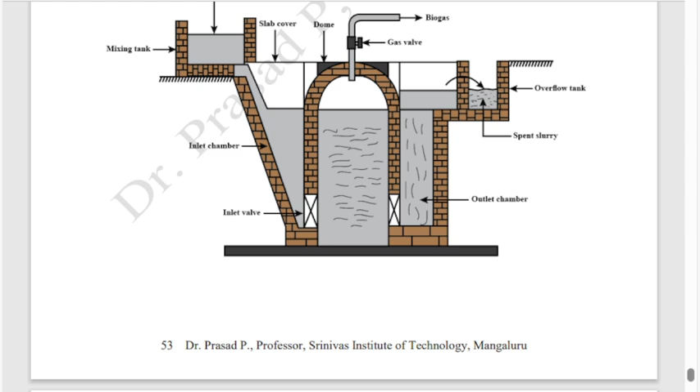Now let us see the different types of biogas plants which are currently available or in use. Biogas digesters are designed to increase or facilitate the anaerobic digestion process. Common types include fixed dome digesters, floating drum digesters, plug flow digesters, and batch digesters. We'll see all four in this class video, only as an introduction. We're not going in depth into how they are built, the materials used, or the exact terms. We are just introducing what different types are there.

So we can see the fixed dome digester. Here everything is fixed, made with bricks. Everything you can see is fixed, including the dome. Do you know what a dome is? The dome of this particular structure is called the dome. So the dome structure is fixed, therefore it's called the fixed case.

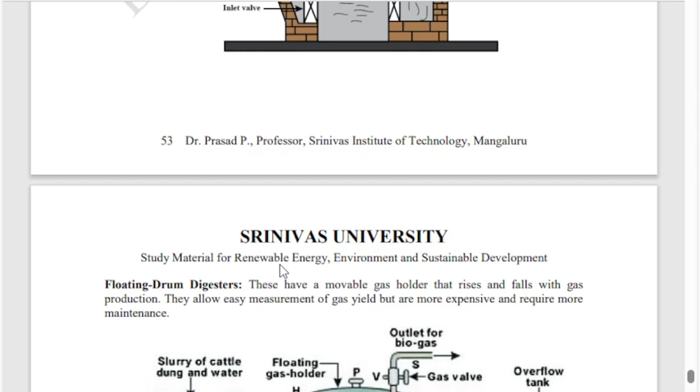Then here comes the floating drum digester. You can see this is the drum, and it can float. It can come down or go up depending on the water or content present. If it decreases, it comes down; if gas pressure pushes it, it goes up. So we have the floating drum case.

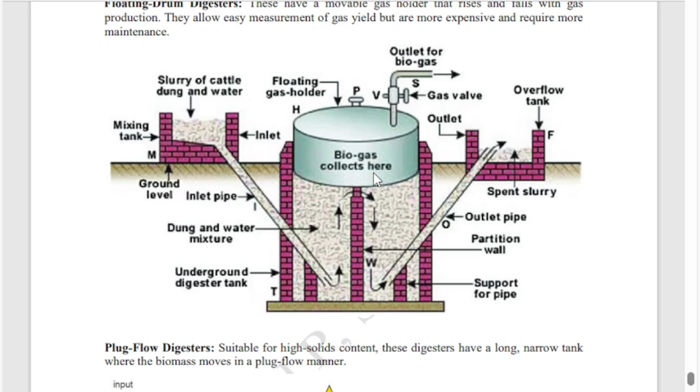And there is plug flow, just like step by step movement of the food waste, finally getting converted into gaseous form. There is a screw for rotation. Whatever input is given through the screw rotates and reaches the end, and different biochemical reactions take place in between, and the gas is collected.

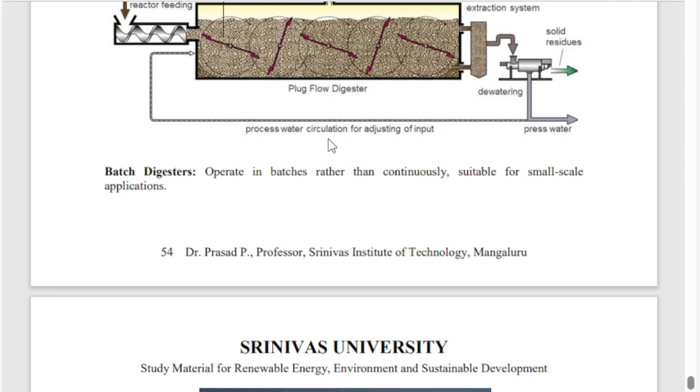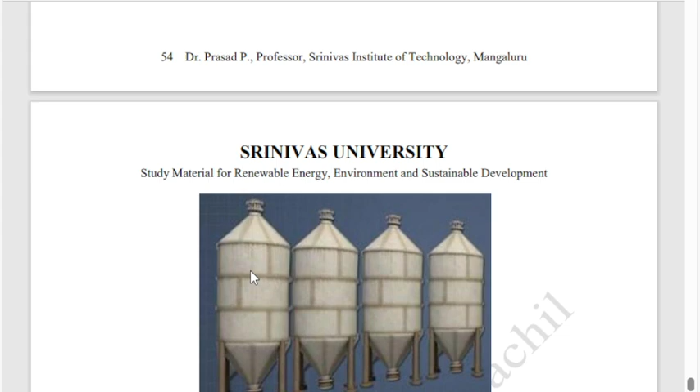That is plug flow. And finally, there is the batch digester. Batch digesters work step by step. Sometimes it is kept in a first container for some time, then transferred to a second one, then after some time a third one, then after that into the last one. And whatever gas is formed is used. That is the batch type. So these are the four different types of biogas digesters.

Roughly, you need to draw the diagram if it's asked. At least you should remember the names: fixed dome digester consists of a fixed, non-movable dome and a digester tank. They are simple, durable, and relatively low cost.

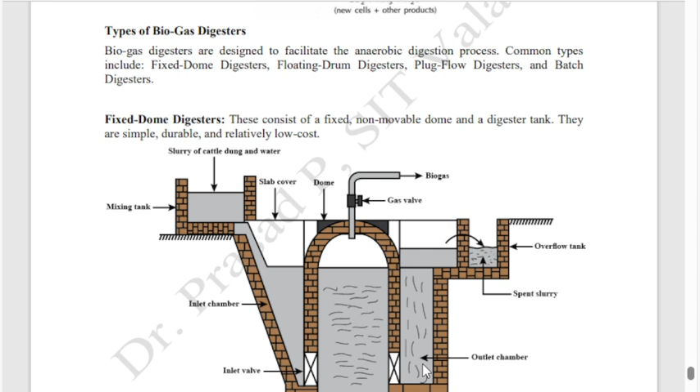There is a tank to supply the waste food, a mixing tank. Then it is taken inside, where the biochemical reaction takes place. Gas will be formed and taken out using a gas valve, and whatever waste is left after digestion will, by default, be pushed to another chamber, from where it has to be taken out.

Second is the floating drum digester. They have a movable gas holder that rises and falls with gas production, allowing easy measurement of gas yield, but they are more expensive and require more maintenance. Once the drum meter moves up, that indicates gas generation inside; if the drum goes down, it means gas production is less. So we get an indication of the yield by seeing the drum's movement. But making such moving drums is a little more expensive and requires more maintenance.

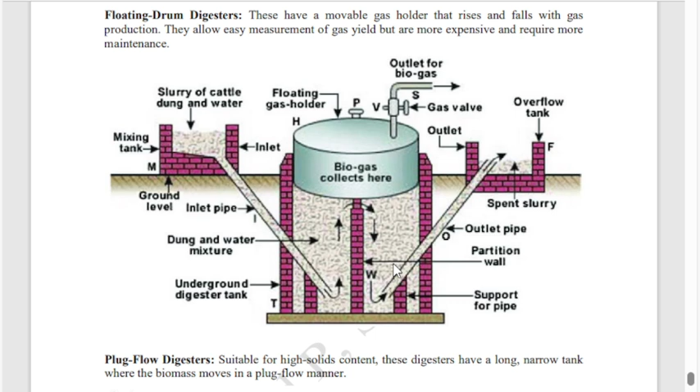The remaining things are almost the same: there is a mixing tank where the waste is mixed and then taken inside, where the reaction takes place, and whatever waste remains is, by default, pumped or pushed out with pressure. Then plug flow is suitable for high solid content. These digesters have a long, narrow tank where the biomass moves in a plug flow manner, rotating and pushing along. This causes mixing and crushing, and the biological reaction also takes place, gas is formed, and the remaining sludge is removed.

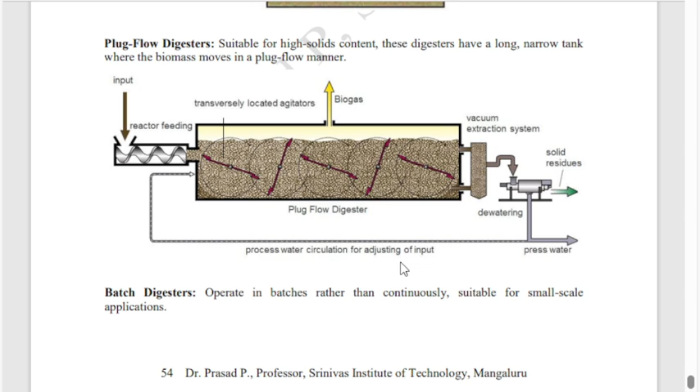By seeing this image you will get the idea. Batch digesters operate in batches rather than continuously, and are suitable for small scale applications.

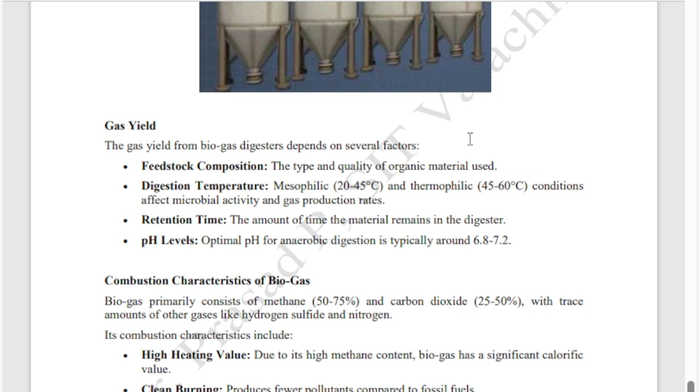Now the gas yield. The gas yield from a biogas digester depends upon several factors, such as the feedstock composition - the type and quality of the waste material used. We don't want to put our food waste as such; the waste material has to be processed, so its composition is one of the criteria.

Digestion temperature: if it is 20 to 45 degrees Celsius, we call it mesophilic. If it is 45 to 60 degrees Celsius, it is thermophilic. These conditions affect microbial activity and gas production rate, because a chemical reaction happens using microorganisms. Sometimes the temperature goes up to 60 degrees Celsius and some microorganisms cannot survive at that temperature, which affects the process, since some microorganisms need a particular temperature to be active. So biogas production also depends upon the digestion temperature.

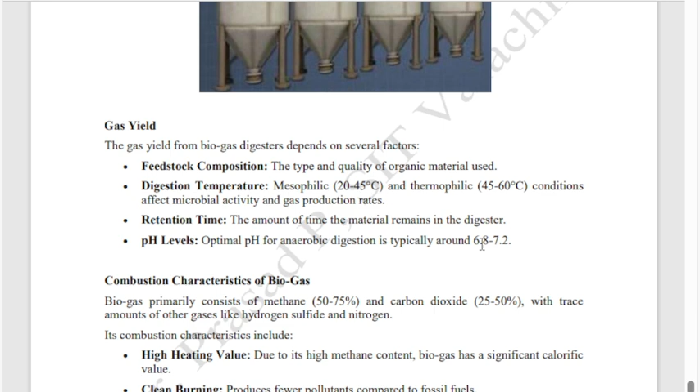Retention time is the amount of time the material remains in the digester - how much time we keep the material inside for digestion, which also affects the gas yield. Then the level of pH, approximately neutral pH - exactly 7, between 6.8 to 7.2 - is needed for anaerobic digestion.

Characteristics of biogas: it primarily consists of methane, up to 75%, then 25 to 50% carbon dioxide, with the remainder being hydrogen sulfide and nitrogen, all present in the biogas generated.

The combustion characteristics are high heating value, clean burning, and flammability. Due to the high methane content, biogas has a significant calorific value. Calorific value means how much energy is inside that converts to heat - how much heat we generate from a fuel, we call it calorific value.

It is also clean burning - there is not much pollution from biogas plants. Gaseous pollutants are not there compared to other fossil fuel burning like wood, which naturally produces more pollution. In a biogas plant, the pollution is very less; it is clean burning with no formation of pollutants.

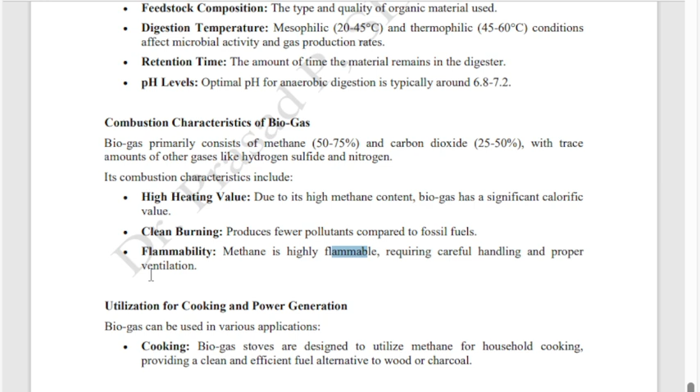Methane is highly flammable - it catches fire easily, that is the meaning of flammable, it can catch flame easily, hence the name flammable. It requires careful handling and proper ventilation because it is more than flammable; we have to be very careful since it will catch fire very easily.

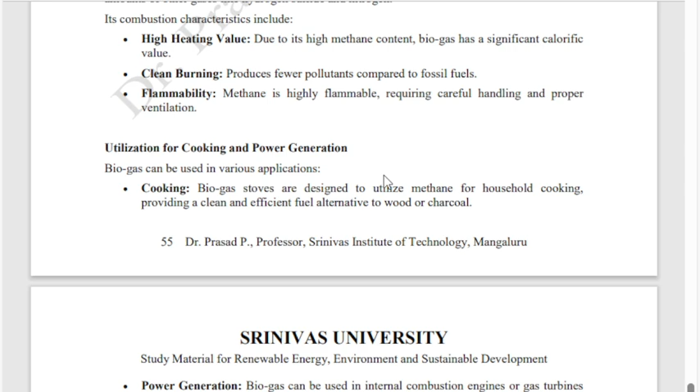Then utilization of biogas plants - where it is used. It is used in normal cooking. Biogas stoves are designed to utilize methane for household cooking, providing a clean and efficient fuel alternative to wood and charcoal. In our institution also, we have a biogas plant in our canteen - those who haven't seen it can go and visit. We are generating biogas and using it for cooking work.

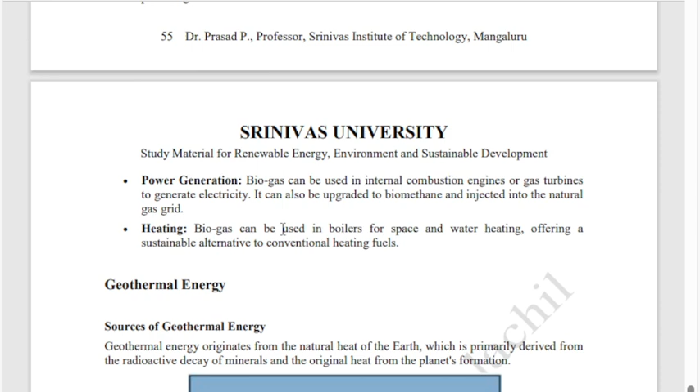Then power generation - biogas can be used in internal combustion engines or gas turbines to generate electricity. It can also be upgraded to biomethane and injected into the natural gas grid. The biogas plant can be integrated with the natural gas system - natural gas stores from the earth itself, and that generation can be connected to the grid.

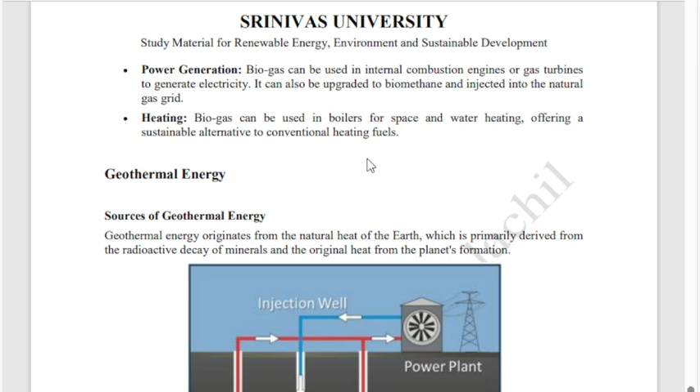Heating - biogas can be used in boilers for space and water heating, offering a sustainable alternative to conventional heating fuels. So that's about biogas and biogas types and related topics. Next, geothermal energy is an entirely different topic - I will take a separate video on that.